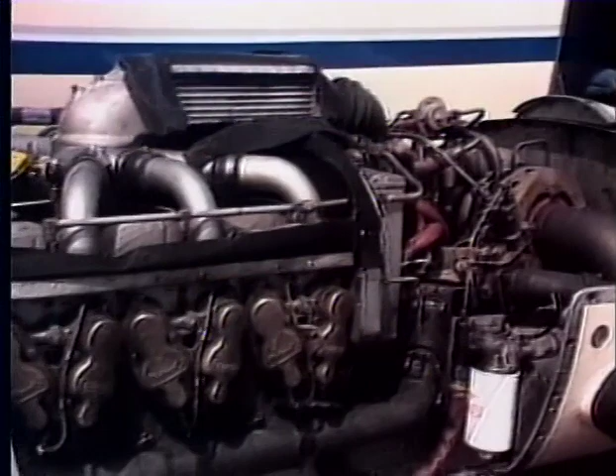What you and I will talk about is the theory and construction of aircraft engines. We're going to lead off by talking about reciprocating engines, you know, these with pistons that fly all around and shake and rattle. We'll get into turbines later on.

Let's talk about the 5 events in a 4-stroke cycle engine. Now, wait a minute—what in Sam Hill is a 4-stroke cycle engine? It's just a 4-cycle engine. That's the FAA's fancy terminology for a 4-cycle engine. They call it a 4-stroke cycle engine. And yes, you heard me right, I said, what are the 5 events in a 4-stroke cycle engine?

Well, here's the way the FAA does it. We all know how an engine works. The intake valve opens, the piston goes down, it sucks in the fuel-air mixture, and that's called the intake stroke. Then both valves close, the piston goes back up and squeezes the fuel-air mixture. That's called the compression stroke.

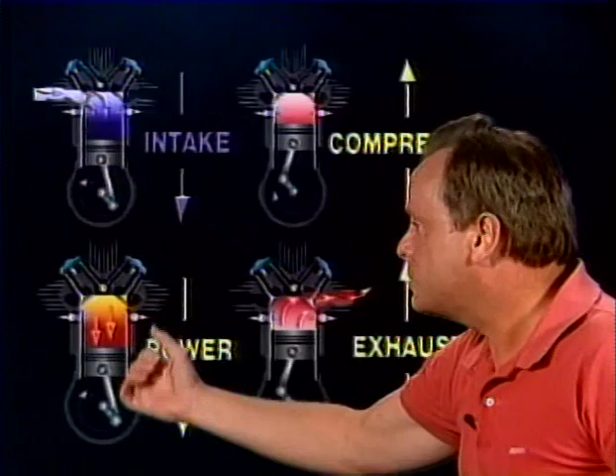And here's the 5th event: the spark plug fires, you have ignition. With both valves closed, the fuel-air mixture burns and expands, shoving the piston back down, and that's called the power stroke. Then the exhaust valve opens, the piston goes up and shoves the exhaust out the exhaust system, and that's called the exhaust stroke. So the 5 events in a 4-stroke cycle engine are intake, compression, ignition, power, and exhaust.

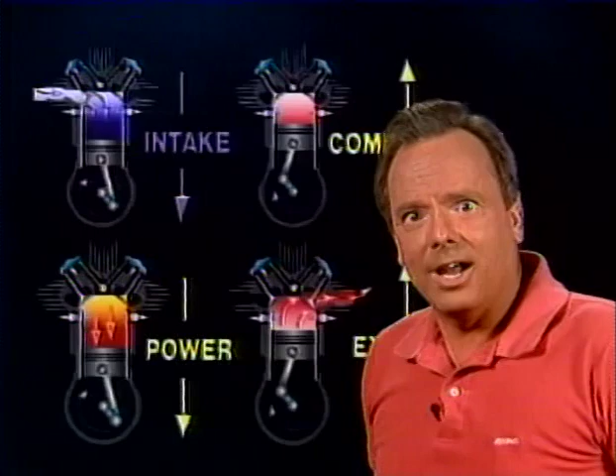Now, I said that in class one time, and some guy said to me, 'Hold it, wait a minute, that's way too doggone complicated.' I said, 'Complicated? What are you talking about? What's so complicated? All I said is, any internal combustion engine is simply a matter of intake, compression, ignition, power, and exhaust.' He said, 'This is way too complicated.' I said, 'All right, what's less complicated?' He said, 'Well, everybody ought to know, especially you ought to know—any internal combustion engine is simply a matter of suck, squeeze, fire, bang, and blow.'

All right, you can make out of that whatever you want. That is not official FAA terminology, but it does help me to remember it. But as far as the FAA is concerned, any internal combustion engine is simply a matter of intake, compression, fire or ignition, power, and exhaust.

Now, they'll ask you some questions about a 4-stroke cycle engine, and they're going to say, on the compression stroke, would the intake valve be open or closed? Well, if you expect to get any compression at all, it's got to be closed. So the intake valve closes on the compression stroke.

And they're going to say, all right, let's assume the exhaust valve of a 4-stroke cycle engine is closed, and the intake valve is just closing. What stroke are you on? Well, once again, if both valves are closed, that's the compression stroke, because the intake valve is just closing, and it does that on the compression stroke.

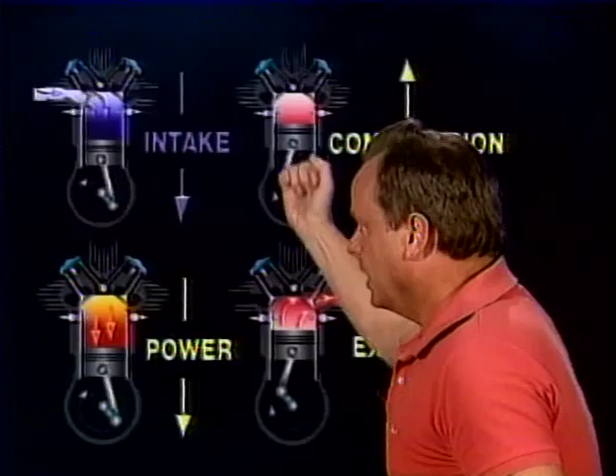Now, here's a couple concepts that are really going to be useful to you to understand some questions later on for the written exam. These 2 concepts, you probably already know them—top dead center and bottom dead center. They're going to be helpful in determining valve overlap and setting timing, and answering questions on a test more than anything else.

All right, let's take a look at it. Top dead center is when the piston has gone on its upward path, stops, reverses itself, and starts back down again. Top dead center is when the piston reverses itself right there. And by the way, it's also when the piston is furthest away from the crankshaft, because the piston is going up away from the crankshaft at that point.

What's bottom dead center? Well, it's when the piston is going down, gets to the bottom of its stroke, and then reverses itself. At that point, the piston is as close to the crankshaft as it's going to be. That is top dead center and bottom dead center. We're going to talk about those concepts later on.

Now, another concept we want to talk about is valve overlap. When I explained intake, compression, power, and exhaust, I implied that these valves open and close at top dead center and bottom dead center, but they don't. In order to help the engine breathe a little better, scavenge the exhaust out of the engine and so on, these valves open slightly off top and bottom dead center. For instance, let's take a look at it.

First of all, at the end of the exhaust stroke, very often you'll find that when the piston is going back up on the exhaust stroke, the intake valve will open 15 degrees before top center. The reason for that is, as the new intake fuel-air mixture comes into the engine, it helps shove out the burnt mixture out the exhaust system.

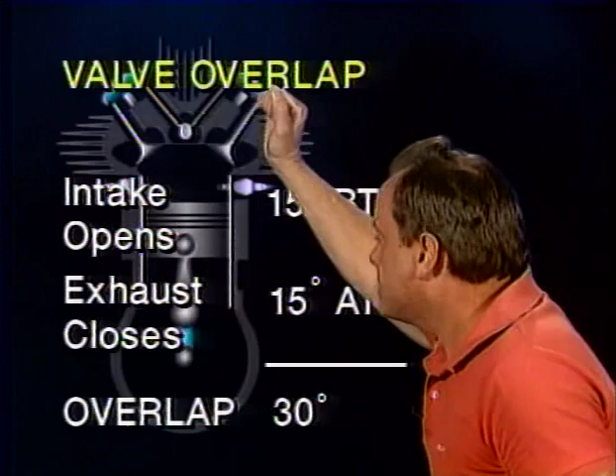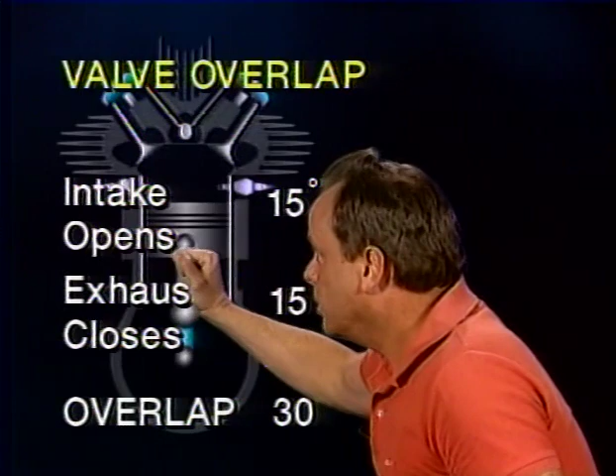Both valves are open for that 15 degrees, and then the exhaust valve also stays open until the piston starts back down 15 degrees after top dead center, because you're still having some of the intake come in and shove the exhaust back out. So there's actually 30 degrees of valve overlap, as you finish the exhaust stroke and start the intake stroke. During that time period, both valves are open for 30 degrees, and that's called valve overlap.

Now, they're going to ask you a question about this on the test, and the question is, why do you have this valve overlap? Why do you have two valves open at the same time? And what is the importance of proper valve timing? Why is that so important? There are actually two reasons you have valve overlap and two reasons proper valve timing is so important.

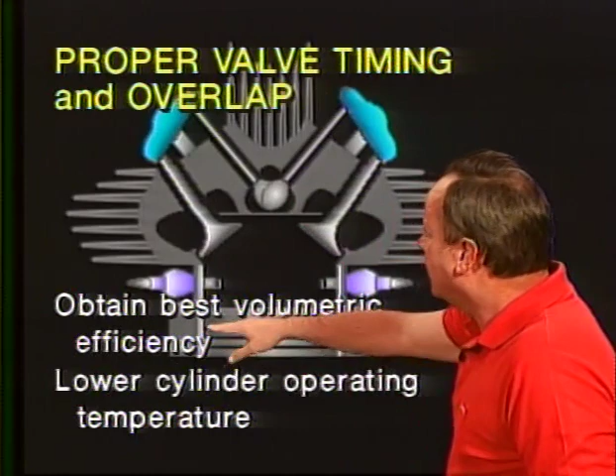These two reasons are that these things help obtain best volumetric efficiency. You might ask, what is volumetric efficiency? Well, that's the ratio of the charge you're putting into the cylinder to the displacement of the cylinder. If you're getting a lot of charge in the cylinder, it means you have very good volumetric efficiency. The other reason proper valve timing and overlap is important is that you get lower cylinder operating temperatures.

Now, these are the correct answers to this question on a test. They also give you a couple of false answers that don't make sense - they're actually correct statements, but not complete answers. For instance, one false answer is that you want to achieve the best possible fuel-air charge, and that's the reason you have proper valve timing and overlap. Well, getting the best charge is one element in volumetric efficiency, and getting the best charge in is actually a function of how long you have the intake valve open. That's not the correct answer. The correct answer is to obtain best volumetric efficiency.

Another answer they give you that's not totally complete is that the reason you have valve overlap is you get better scavenging of exhaust gas. Well, the most important thing for good scavenging of exhaust gas is opening the exhaust valve before you get to bottom dead center, which lets the exhaust start out early on the power stroke. That's how you get good exhaust gas scavenging, but that's not the correct answer to the test. The correct answer on the test is that the reason proper valve timing and overlap is so important is so that you can obtain best volumetric efficiency and lower cylinder operating temperatures. In this particular case, it's important to know these two answers word for word.

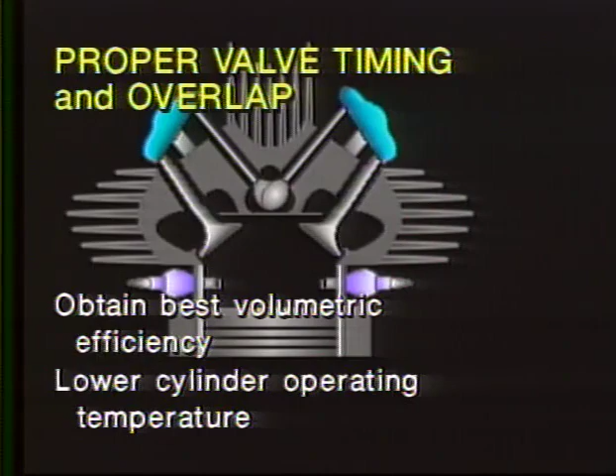Now, they're going to ask, what would happen if the intake valve opened too early? Instead of 15 degrees before top center on the exhaust stroke, let's assume it opened, say, 30 degrees. What would happen? You could have what they call backfiring through the intake, because if the intake valve opens too early when the piston's going up on the exhaust, you're going to have a lot of hot exhaust go into the intake, and that can ignite the intake mixture, causing a backfire. So backfiring would occur - using FAA words here - if the intake valve opens too early, because the exhaust gases would flow into the intake manifold and ignite the incoming fuel-air mixture. So valve overlap promotes better scavenging and cooling characteristics of the engine.

By the way, don't try to memorize these valve overlap numbers - that varies. Sometimes the exhaust valve closes some 10, maybe 15 degrees after top dead center. Once again, it varies. So let's take a look at how the valves might operate on all four strokes of a reciprocating engine.

And here's a typical engine here, and we're starting off with the intake stroke, and of course the piston is going down.

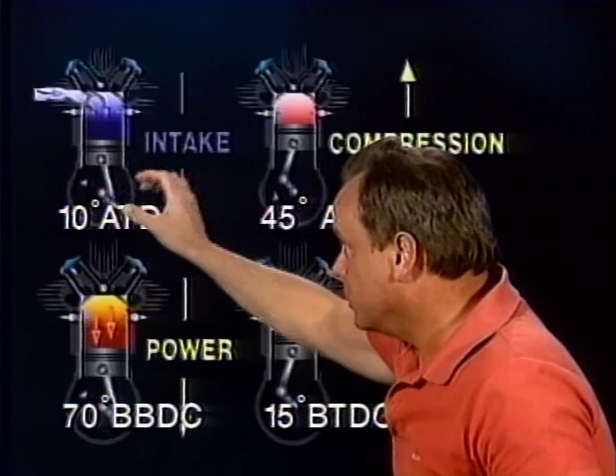On the intake stroke, the exhaust valve doesn't close until about 10 degrees after top dead center, because exhaust is still going out even though the piston's starting back down. So the exhaust valve closes on the intake stroke 10 degrees after top dead center.

Now we've got the piston going down, intake coming into the engine, and on the compression stroke the intake valve stays open and doesn't close until 45 degrees after bottom dead center. The reason is, even though the piston's starting back up, the intake valve is still open because

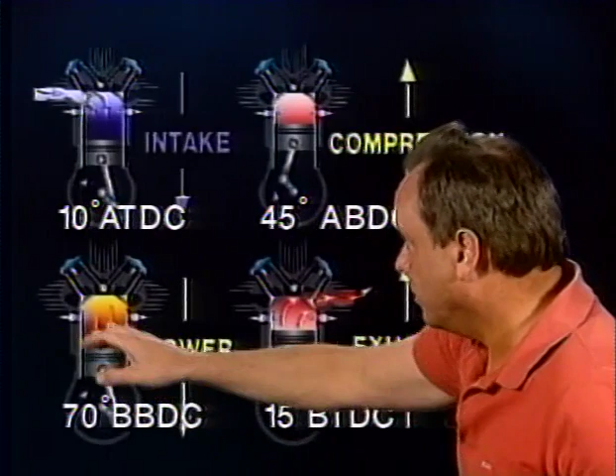some of the fuel air mixture is still rushing into this cylinder. The intake valve closes at 45 degrees after bottom dead center. Finally the intake valve closes. Now you compress the fuel air mixture as the piston goes up, and of course you have ignition, the spark plug fires, the fuel air mixture burns and expands, shoving the piston down.

You'd think both valves are closed for the entire power stroke, but they're not, because at 70 degrees before bottom dead center the exhaust valve opens and the burnt fuel air mixture starts going out the exhaust system right at this time, because in the first part of the travel almost all of the energy has already been taken out of that power stroke.

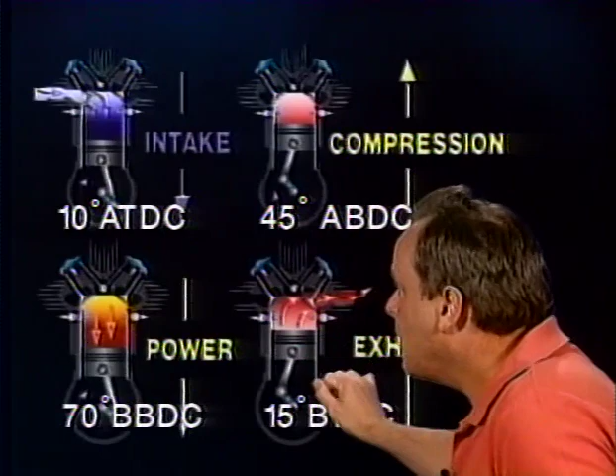And so now we're using the last little bit to help the exhaust go out and help cool the engine. Now the piston goes back up on the exhaust stroke, and about 15 degrees before top dead center the intake valve opens, to help scavenge the engine, to help the intake come in and replace some of the exhaust there. So here's how the valves might operate in this particular case.

Now here's the question they're going to ask you about this on the FAA written exam. They're going to say, given this particular situation, how many degrees of crankshaft rotation are both valves seated this time? Earlier we talked about valves being open, but now we're talking about how many degrees of crankshaft rotation both valves are seated. Well, let's see if you and I can figure it out.

Let's take a look at the numbers. First of all, it's not correct, but we think of during the power and compression strokes both valves being closed. So let's start off that way. Let's assume that were the case, and then we'll make some deductions and change it from there.

Think of on the power stroke both valves being closed, that's 180 degrees of rotation of the crankshaft. And on the compression stroke both valves being closed, that's 180 degrees also. So on the compression and power strokes that's 360 degrees.

But we know that both valves aren't closed. For instance, the intake valve closes 45 degrees after bottom dead center, not at bottom dead center, so you can subtract 45 degrees of crankshaft rotation there. And we know that the exhaust valve opens on the power stroke 70 degrees before bottom dead center. So instead of both valves being closed for 360 degrees on those two strokes, they are closed for 360 degrees minus 45 degrees minus 70 degrees, and both valves are closed for 245 degrees.

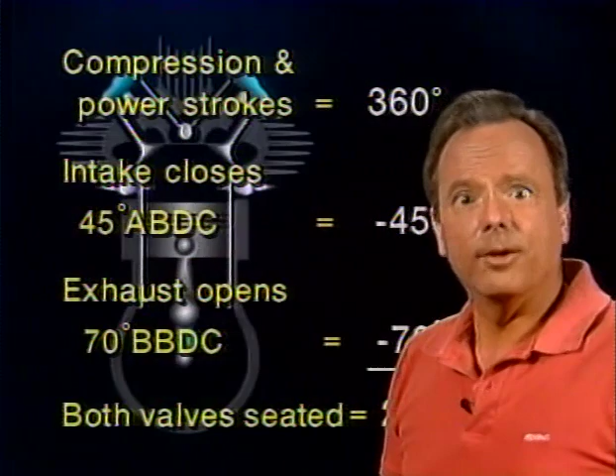Now, as you know, the pistons in an engine don't fire in 1, 2, 3, 4, 5, 6, 7, 8, 9 order. So let's assume you had a 9-cylinder engine. They don't fire in that order. What they do is fire in a firing order that skips around the engine a little bit.

Now the question is, why do you have a firing order that does that? The reason is it helps eliminate vibration and helps balance the engine. Here's the way the question goes on the FAA exam: what is the firing order on an inline, V-type, or opposed reciprocating engine designed to do? The answer is the firing order is designed to eliminate vibration to the extent that's possible and to provide for balance of the engine.

Now we're going to solve a problem in just a minute.

In order to solve that problem, you need to know the firing order in a 9-cylinder radial engine. Now, the engines are numbered so that the number 1 cylinder is at the top, and as you're sitting in the aircraft, 2, 3, 4, 5 are clockwise as you go around. Now, that's how the cylinders are numbered.

How do they fire? What's the firing order? Let's take a look at the firing order in a 9-cylinder radial engine, and it's really pretty easy. First all of the odd cylinders fire: 1, 3, 5, 7, 9. Then you go back and all the even cylinders fire: 2, 4, 6, 8. That's the firing order in a 9-cylinder engine. 1, 3, 5, 7, 9, 2, 4, 6, 8.

All right, now here's the question you need to know. Let's assume you're using a differential pressure to test the compression on an engine. You're using the number 3 cylinder, and you've rotated the engine, first of all, to top dead center compression stroke for the number 1 cylinder.

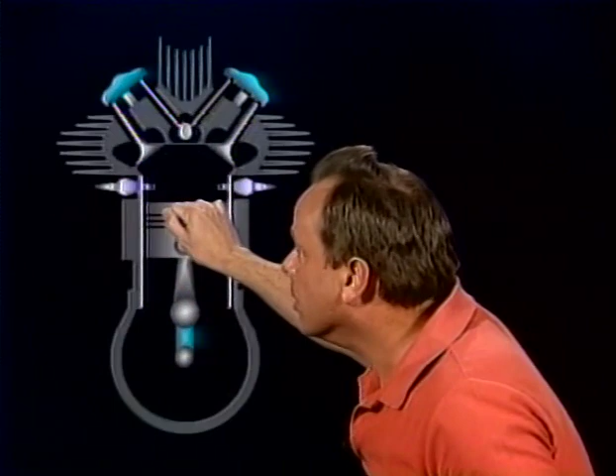See, nothing to it. So, how are engines timed? Well, the ignition is also timed. The whole idea is if the ignition and valves are adjusted properly and the fuel-air ratio is proper, the combustion process should actually be completed just after top dead center at the beginning of the power stroke. In order for that to happen, the fuel-air mixture is generally ignited before the piston gets to the top of the compression stroke. How much before? Generally about 28 degrees.

The fuel-air mixture on a compression stroke is normally ignited 28 degrees before top dead center. So let's assume that the ignition occurs on an engine somewhere around 28 degrees before top dead center on a certain 4-stroke engine, and let's assume that the intake valve opens.

Now let's assume that you have compression going up 28 degrees before top dead center, the spark plug fires, fuel-air mixture burns, piston continues up, and then at top dead center, the piston reverses itself, and now you have the power stroke. You complete the power stroke, and then you have the exhaust stroke. Let's assume on the exhaust stroke the intake valve opens, as you know it does, 15 degrees before top center.

Now, the question they're going to ask you about this is: how many degrees will this crankshaft travel after ignition before the piston comes back around again and the intake valve opens on the exhaust stroke, or before the intake valve opens again? Let's you and I take a look at the numbers.

First of all, we have the compression stroke, and before you get to top center, the ignition occurs 28 degrees before top center. So you have that 28 degrees first, and then you get to top dead center, and then you start the power stroke. You have 180 degrees of power stroke, and you'd have 180 degrees of exhaust stroke, so you have 360 degrees there. But hold the phone - the exhaust stroke has the intake valve opening 15 degrees before top center, so you'd have to subtract that 15 degrees, and the answer to the question is 373 degrees.

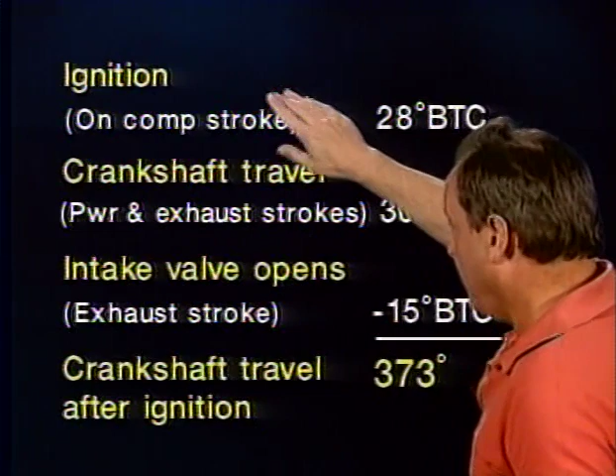Now, what was the question? The question is, how many degrees does the crankshaft travel from the time you have ignition before the intake valve opens again? And the answer is 28 degrees plus 360 minus 15, or 373 degrees. You have to have a pretty good idea of how a piston engine works to answer these, but once you have that, you've got it nailed.

All right, now let's take a look at another question. They're going to say, all right, super mechanic, you have an engine with a stroke of 6 inches - that's how far the piston travels in one direction, either up or down. And that engine is operated at 2,000 RPM. Now, the question is, when will the piston be moving at its maximum speed inside the cylinder?

And the answer is, there's a lot of smoke in this question. It doesn't matter what the stroke is, it doesn't matter what RPM the engine's operated at. The piston inside the cylinder is always moving at maximum speed when the crankshaft is at 90 degrees, like so. What happens at that particular point is the piston is moving at its fastest, at maximum velocity, and the connecting rod and the crank, or throw crank, are at right angles. When that's the case, the piston is going the fastest because the radius has the piston moving at its greatest speed at that particular point.

All right, now here's a question they ask you on the FAA written exam. They say, what is the total piston displacement of an engine, and how do you figure it? Well, the way you figure out the displacement of an engine is you take this little circle at the top of the cylinder, find the area of it, and multiply it times the stroke. That will tell you the displacement of one particular cylinder. Then all you have to do is multiply that times the number of cylinders.

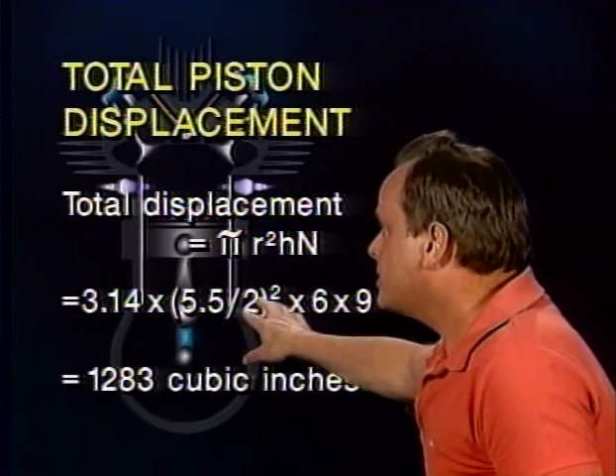The bore is the total diameter of the piston, and we want half of that. So take 5.5 divided by 2. When you get the answer, multiply it times itself, and that's the square - that's radius squared. If you take 5.5 divided by 2 and multiply it by itself, that's radius squared.

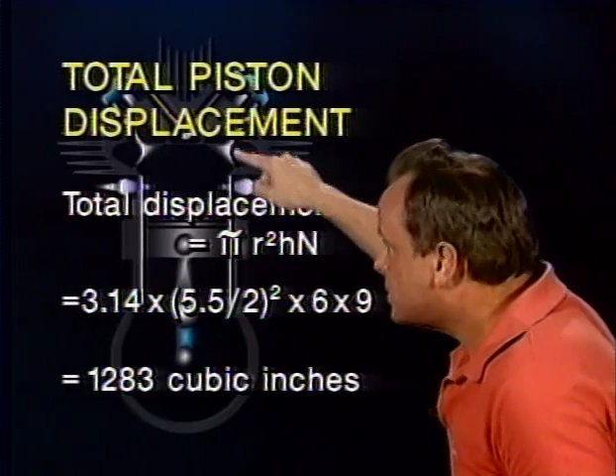Now, the total displacement is what we want to know. It's a 9-cylinder engine with a bore of 5.5, and let's assume a stroke of 6 inches. What you would do is take pi, 3.14, take the diameter of the piston, which is the bore, and divide it by 2, then multiply that answer by itself to get the radius squared. Multiply it times 6, because that is the stroke of the engine. Multiply that times 9, because it has 9 cylinders in the engine, and you have figured out the displacement of that particular engine. If you use your electronic calculator and do all this, you find out it's 1,283 cubic inches. That's about an average displacement for a 9-cylinder engine.

Now let's talk about another concept they want you to know about: the compression ratio of a cylinder. How do you find the compression ratio? You take the total volume of the cylinder when the piston is at the bottom, where the cylinder has a big volume, and you divide that by the volume of the cylinder when the piston's at the top, and that gives you the compression ratio of that particular engine.

Let's figure out the compression ratio of an engine. First, let's assume when the cylinder's at the bottom, the volume is 70, and when the cylinder's at the top, the volume is 10. How do you find the compression ratio? All you have to do is divide. What's the compression ratio of this engine? 7:1. It's written 7:1. Fantastic.

Now, why do you have an engine with lots of cylinders in it? The P-51 Mustang had that beautiful Merlin engine, sounds like silk, has 12 cylinders. Why so many cylinders? Well, with a greater number of cylinders, the smoothness of operation of an engine increases, and the reason is because the power impulses are spaced closer together.

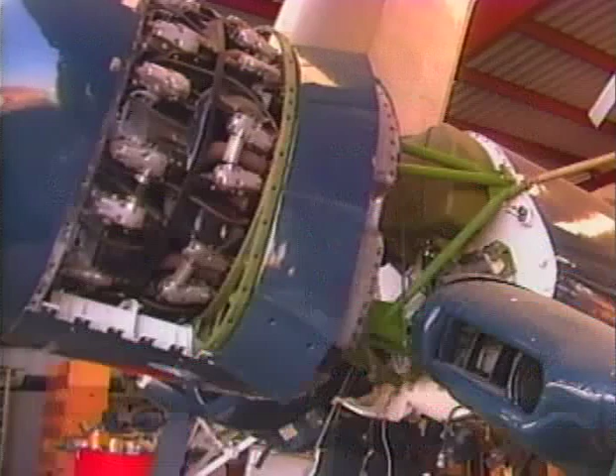How many times does a crankshaft have to rotate for each cylinder to be fired in an engine? The answer is if it's what the FAA calls a 4-stroke cycle engine, the crankshaft must make 2 complete rotations for each cylinder to fire. So the question is, if you have a 4-stroke cycle engine and that engine is to be fired 200 times a minute, how many times a minute must the crankshaft rotate? The answer would be 400 times a minute.

Now let's take a good look at a crankshaft, and one of the things the FAA wants you to know about crankshafts is that there are movable counterweights in here - weights that can move around. They're going to ask you on a test what these movable counterweights are used for. The answer is these movable counterweights are used to reduce torsional vibrations - that's twisting vibrations on the crankshaft. If you put a big rod on the table and a great big flywheel at each end, you could get these flywheels going back and forth like this, and that would be torsional vibration.

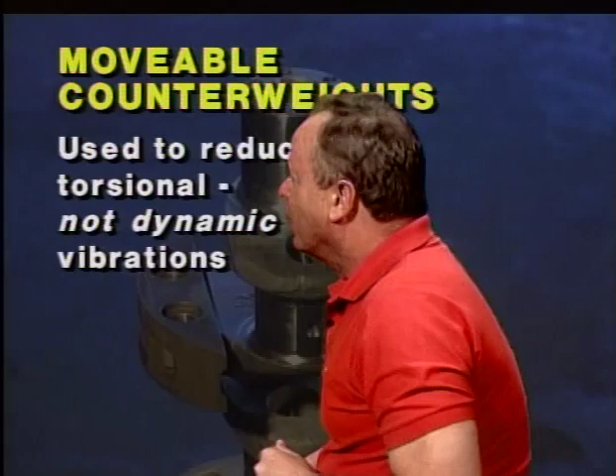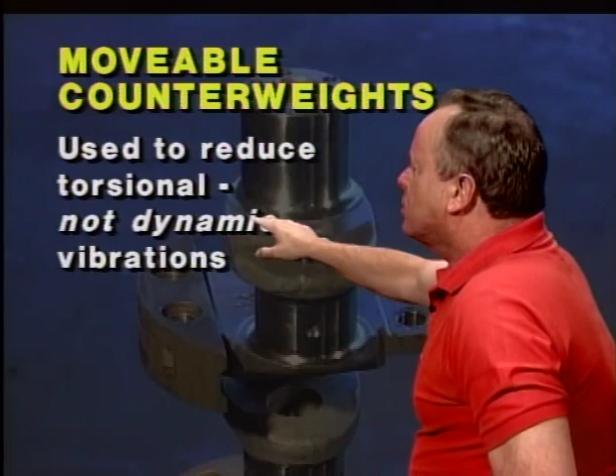Well, that's a bad deal in a crankshaft. It's a type of dynamic vibration, but it says not just dynamic vibrations - it's not all dynamic vibrations, they're looking for torsional vibrations. That is a type of dynamic vibrations, but the thing you need to remember is the purpose of these movable counterweights is to reduce torsional vibrations, not just dynamic vibrations, because they're specifically looking for torsional vibrations.

Now let's talk about cylinders, and here is a cylinder right here inside an engine like so. By the way, the FAA wants you to know sometimes you have a choke or taper ground cylinder, and the whole cylinder itself is bored with a slight taper or choke, kind of like a shotgun can be sometimes.

The end of the bore nearest the head is smaller than the skirt. This is the skirt down here, and this is the end of the bore nearest the head inside there. The reason it's smaller is to allow for expansion at greater operating temperatures near the head. When you get done, you'll have almost a straight cylinder, and that choke will go away when the engine gets hot.

So when the engine is hot, the narrower taper here near the cylinder head expands, and therefore it becomes a straight cylinder rather than a tapered cylinder at that point. That's why they grind cylinders sometimes with what is called a choke or tapered grind.

Now let's take a look at the cylinder walls. The cylinder walls of an engine get a tremendous amount of wear, and we're going to ask you, where do they get the greatest amount of wear? The cylinder walls get the greatest amount of wear near the top of the cylinder, and that's where the temperatures and the pressures are the greatest. So the greatest wear on the cylinder is near the top.

These are FAA test questions coming at you hard and fast here.

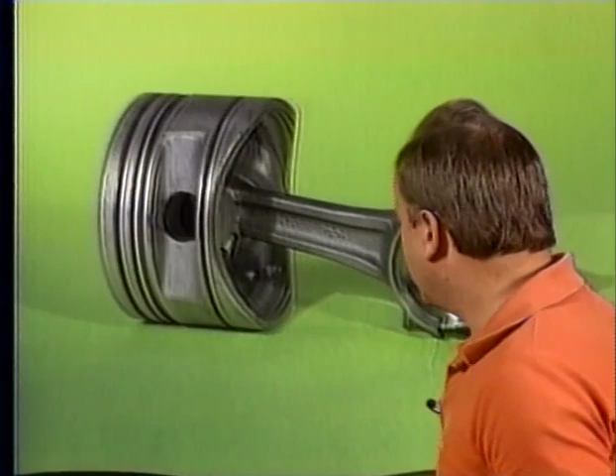Now let's talk about pistons and full floating pins in a piston. Here's a piston, here's a rod. What is a full floating pin? First, the pin is the connecting place between the rod and the piston itself. If it's a full floating pin, it means you can have motion between the pin and the piston, and between the pin and the connecting rod. The pin can rotate clear around, having motion between both the piston and the connecting rod.

Now they're also going to ask why sometimes the undersides of the pistons are finned. In this particular case it's not, but the answer is to provide for greater heat transfer to the engine oil. So if you see fins here, it gives greater heat transfer to the engine oil.

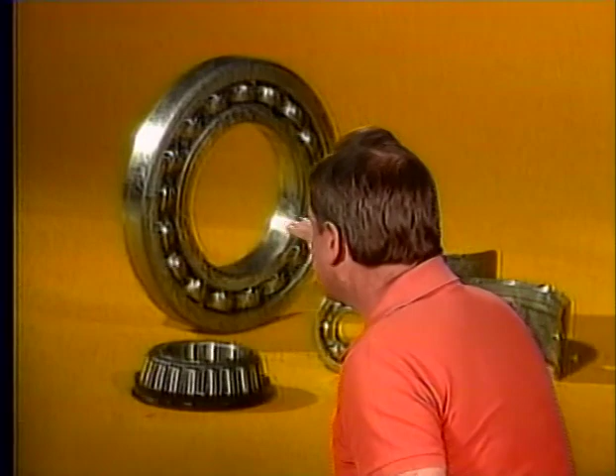Now let's talk about bearings. A bearing is any surface that supports or is supported by another surface, and bearings are designed to reduce friction of moving parts. They're designed to take loads - kinds of loads are thrust loads, which are along the axis of the bearing, and radial loads, which are out from the center of the bearing, or a combination of both.

Types of bearings include plain bearings, which are designed to take radial loads and are used generally for connecting rods, crankshafts, and camshafts in lower power engines. Here's a good example of a plain bearing - these are all plain bearings over here.

Next is a roller bearing, also known as an anti-friction bearing. They can be adapted to either radial or thrust loads, and here's a good example of a roller bearing. Finally, ball bearings provide less friction than any other type.

A ball bearing consists of an inner race, an outer race, a set of polished steel balls, and a ball retainer which keeps the balls from contacting one another - that's a ball bearing. In high-powered reciprocating aircraft engines, there is less rolling friction when ball bearings are used than when roller bearings or any other type are employed. So ball bearings have less rolling friction than any other type of bearing.

Now, we talked earlier about a thrust bearing - that's one designed especially for thrust loads, made with exceptionally deep grooves for the ball races. Bearings designed to resist thrust in a particular direction will have a heavier race design on the side which takes the thrust. A deep groove ball bearing is a characteristic of a thrust bearing used in most radial engines.

Now they ask you some questions about radial engines. One of them is: the master rod bearing in a radial engine is least likely to be what kind of bearing? Well, it's least likely to be a roller or ball bearing, and most likely to be a plain bearing. How much less likely? It's less likely than a rocker arm bearing, a crankshaft main bearing, or a generator armature bearing - those aren't as likely to be plain bearings as is the master rod bearing in a radial engine.

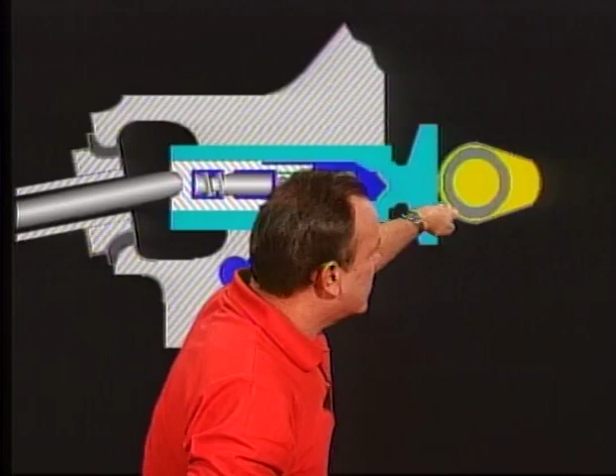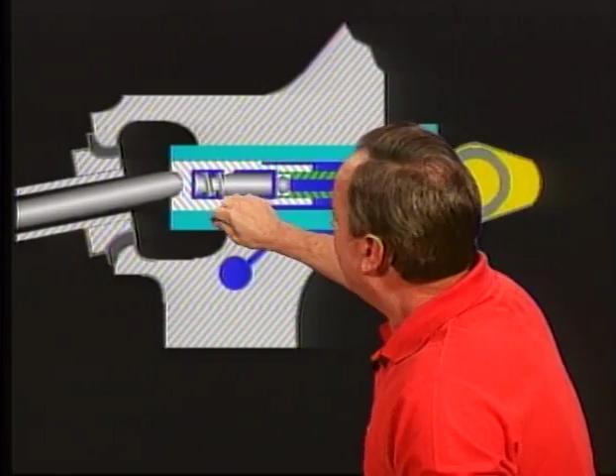Let's take a look at how a hydraulic valve lifter works. Here we have a hydraulic valve lifter, and just to orient you, here's the cam. The lobe comes around and pushes against the tappet, and the tappet shoves over in this direction, and here's the push rod, pushing it over. The deal on a hydraulic valve lifter is that it fills with hydraulic fluid. There's a spring and a check valve, and the whole mechanism works such that the hydraulic fluid we're talking about here is engine oil in this particular case. The mechanism works such that there is no play here. Oil always fills up the space where there would be play, so therefore you have no play back and forth.

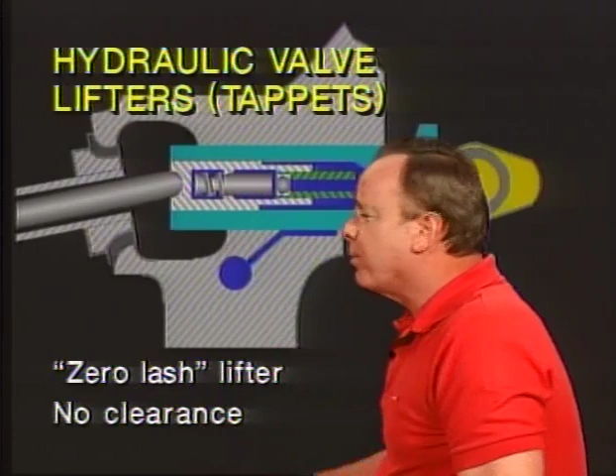There is no clearance on a hydraulic valve lifter, and therefore this is called a zero lash lifter. Now they're going to ask you about these zero lash lifters. That's a hydraulic valve lifter, or a tappet as they call it. So they're going to ask you, during normal operation of an overhead valve engine using a hydraulic valve lifter, how much clearance would be in the valve operating mechanism? And the answer is there is no clearance. It should not exceed 0.000, none at all, after you've reached the minimum inlet oil temperature and cylinder head temperatures for takeoff. So there'd be no clearance at all.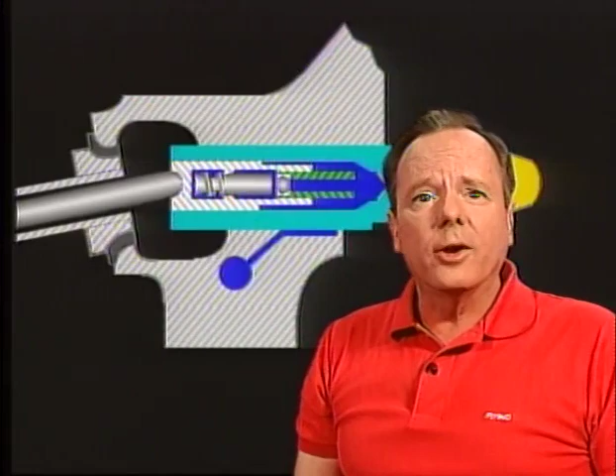Now, let's assume that this piston assembly inside this hydraulic lifter has gone all the way to one extreme. Obviously, you need to adjust the clearance, but you can't do it. How do you do it? Well, the only way you can adjust the clearance in this particular case is simply change the push rod, with push rod replacement, because you cannot adjust the hydraulic valve lifter. If things aren't working out right and you need to change your clearances, you replace your push rods. Just get a different length push rod.

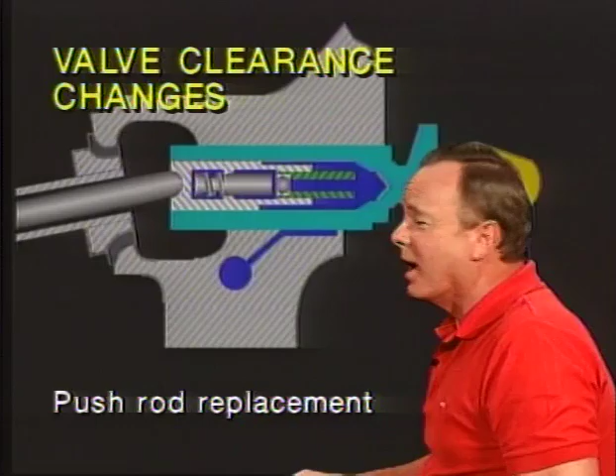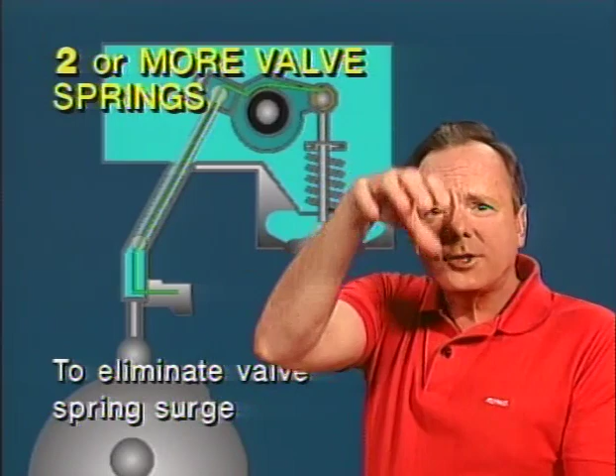Now let's take a look at the valve assembly one more time. One of the things we want to take a look at is the springs. Sometimes when you look at the springs in a valve assembly, you'll notice that each valve sometimes has more than one spring, maybe two or more springs. Why would the valve have two or more springs? The answer is to eliminate valve spring surge. When you have a spring that can oscillate, it'll have a resonant frequency, and sometimes the engine can run at the resonant frequency of that spring. In that case, the spring will float, the valve will float, and it will not work properly. To eliminate that, you put in two or more springs, each having a different resonant frequency, and you hope, therefore, that you eliminate valve spring surge.

Now, sometimes these valves in aviation engines are not solid valves. They are filled with sodium. This is particularly true on exhaust valves. Why would that be? The answer is to dissipate heat well, because exhaust valves particularly have a tremendous amount of heat going by them.

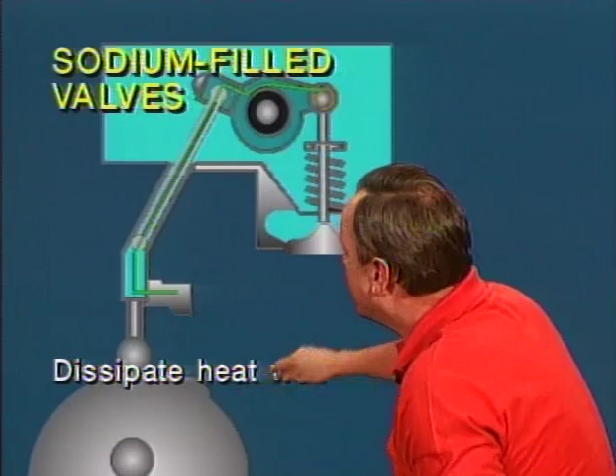You need to be cooled down, and they fill these exhaust valves with sodium to dissipate heat well. Now let's assume you're flying an airplane with an engine that has valves like this—most do if you're flying a piston engine aircraft—and you're having a bad day. Let's talk about what could happen.

There's a lot of wear and tear with this rocker arm pushing against the end of the valve here, and let's assume the end of the valve stem breaks off. If you're having a bad day, the valve could fall inside the cylinder, the piston's going up and down, the valve beats a hole in the piston, and you lose your engine oil and the engine quits, and that could cause an accident. You've had a bad day.

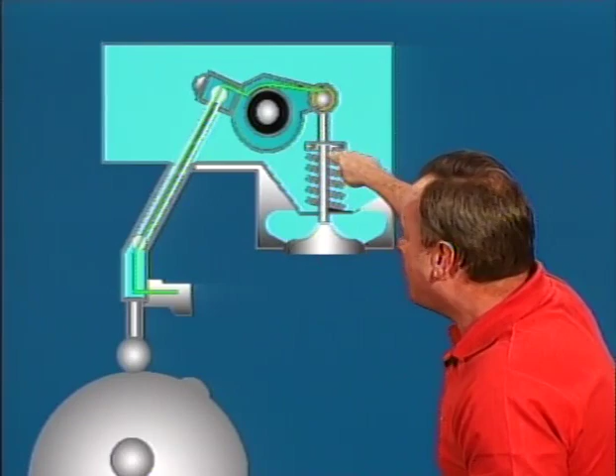If you want to eliminate or minimize the chance of that happening, you can install what is known as a little safety circlip near the top of the valve spring. That safety circlip will prevent the valve from falling into the combustion chamber should the tip of the valve break off, thereby preventing that scenario from happening. So that is what is known, for obvious reasons, as a safety circlip.

Let's talk about propellers and propeller reduction gears. The propeller type certificate data sheets contain a table that lists the engines to which a given propeller is adaptable—translating that into English, if you want to find out if you can put a certain propeller on a certain engine, you go to the propeller type certificate data sheets. That's where you go, type certificate data sheets.

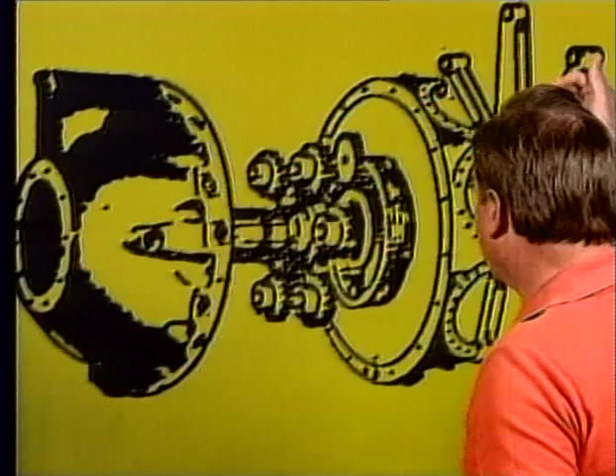Now let's talk about gear reduction of propellers, propeller reduction gears, and their purpose. Here is an example of a radial engine that has a propeller reduction gear, and it operates the propeller at a much lower RPM than the engine. The reason is to allow the engine to have a higher RPM, getting more power, while allowing the propeller to operate at a lower RPM so it's more efficient. It's actually much more efficient aerodynamically for propellers to operate at slower speeds generally than engines. So you have a propeller reduction gear to allow that to happen.

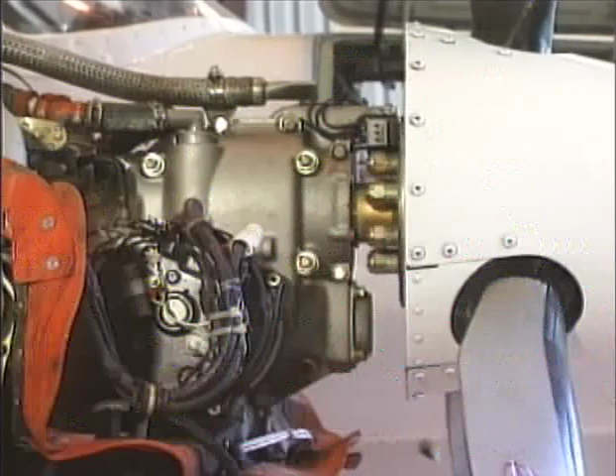Here's a real-life example of a propeller reduction gear. Once again, the whole idea is you're trying to reduce propeller RPM while keeping your engine RPM up, so you talk about how much reduction there is. They're going to ask you a question about this on the test—they're going to give you several gear ratios and ask which one gives you the highest propeller RPM.

The whole idea of gear reduction ratios is to reduce the propeller RPM, so they'll ask which one gives you the highest propeller RPM—it's the one with the least reduction. Here are the ratios: 16 to 7, 20 to 9, and 3 to 2. To answer this, take your electronic calculator and divide 16 by 7, 20 by 9, and 3 by 2, and you get reduction ratios of 2.29, 2.22, and 1.5. Remember, the question was which one gives you the highest propeller RPM—it's the one with the least reduction ratio, and it comes out to 1.5 in this case.

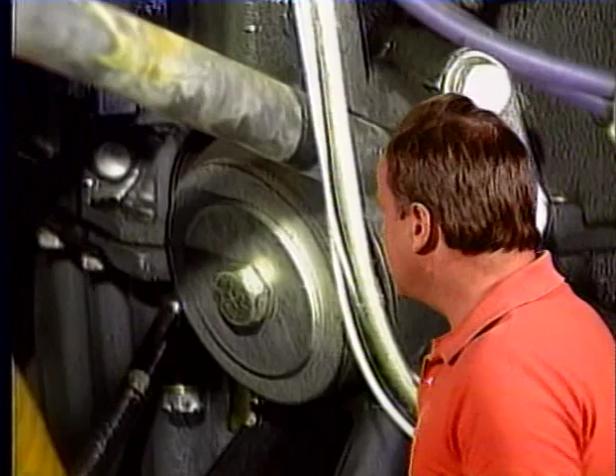Now let's look at how you attach engines to airframes—the way you do it is with suspension. A couple concepts we need to talk about: first, dynamic suspension is putting rubber mounts, or synthetic rubber mounts, on the engine. Let's take a look at some synthetic rubber mounts—these are called dynamic suspension, and that just eliminates vibration. That's the whole idea, just to get rid of vibration.

The next thing we want to talk about is dynafocal mounts. Dynafocal mounts are designed so that you take the stress axes and extend them, and where they intersect will be at the center of gravity of the engine. Basically, this means you're essentially supporting the engine about its center of gravity, or the center of its vibrating mass—they call that the focal point, and that gives a much smoother operation. So the FAA will ask you a question about this: what is the purpose of dynamic suspension?

And the answer is to isolate normal power plant vibrations from the aircraft structure.

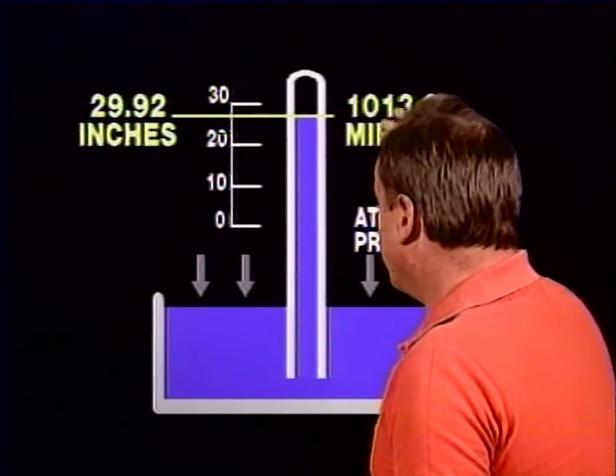Let's wrap up piston engines by talking about a few miscellaneous things the FAA wants you to know. As a mechanic, you ought to know standard sea level pressure is 29.92 inches of mercury. You don't need to worry about millibars. Also, standard sea level temperature is 59 degrees Fahrenheit, not Celsius. That's what you need to know.

Now, if you want to install this engine on an airplane with a standard airworthiness certificate, what do you have to have? The FAA says each power plant must have a type certificate. So if you want to install an engine on an aircraft with a standard airworthiness certificate, the answer is a type certificate.

Now they're going to ask you what critical altitude is. Critical altitude is the highest altitude at which any engine, including a turbocharged engine, will maintain sea level pressure in the manifold, so it can get sea level rated power. On a normally aspirated engine, critical altitude would be sea level—as soon as you leave sea level, the engine begins to run out of power. But on a turbocharged engine, the critical altitude could be a lot higher.

What is horsepower? The horsepower developed inside the cylinders of an engine is known as indicated horsepower. But the horsepower delivered to the propeller of an aircraft is known as brake horsepower—the actual power delivered to the propeller. So inside the cylinders, indicated horsepower; delivered to the propeller, brake horsepower.

Now here's a question: does increased water vapor in the incoming air to a reciprocating engine increase or decrease engine power at a constant RPM or manifold pressure? The answer is increased water vapor decreases engine horsepower, because water vapor is less dense than air, decreases the density of the air the engine is breathing, and also displaces some oxygen. So increased water vapor normally results in decreased engine power at a constant RPM and manifold pressure.

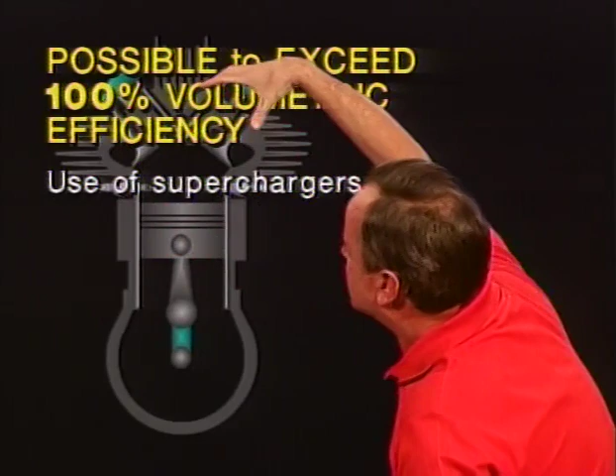Well, yeah, because it's based on standard conditions, and if you could somehow stuff the air into the cylinder, you could get more than 100% volumetric efficiency. How can you stuff the air in there? Well, you can do it by the use of a supercharger and actually stuff the air in the cylinder, and you get more than 100% volumetric efficiency.

Now, let's assume you had a small induction system air leak, and that's going to have a very noticeable effect on the engine. When is it going to bother the engine the most, at high RPM or low RPMs? The answer is the engine is having the hardest time when it's operating at low power, so a small induction system air leak will have the most noticeable effect on the engine at low RPM.

All right, let's talk about these magnificent turbine engines. These engines really are magnificent. Turbine engines have tremendous amounts of power. They operate remarkably smooth, and they're vibration-free. About the only thing you can say against a turbine engine is these things are enormously expensive. And I guess that's the way life goes—anytime something is really, really nice, it's really, really expensive. And it's certainly that way with turbine engines.

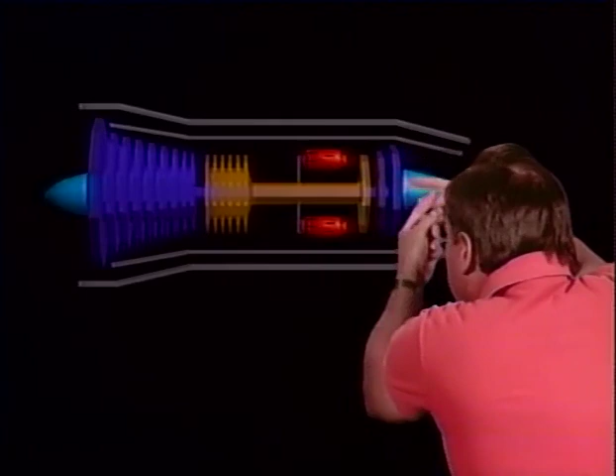All right, let's talk about how a turbine engine works. Let's take a look at a drawing of a turbine engine. First of all, you have the air coming in the intake of the engine up here at the front. Then you have these rotating airfoils that compress the air as it goes through the engine. Notice, by the way, you have intake, now you have compression. So this compressed air now goes back into the engine, enters the burner cans, gets mixed with fuel, and burns. You have ignition, and then the burnt fuel air mixture expands and jets out the back and turns these rotating airfoils, called turbines, and that creates the power to run the compressors.

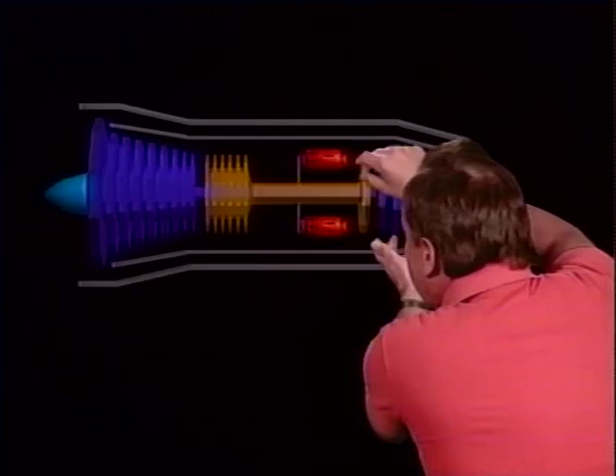You have power, and then the air exhausts out the back. So notice you have those same 5 events taking place inside a turbine engine: intake, compression, power, and exhaust. Well, I should say intake, compression, ignition, power, and exhaust. Now, I got it right there. That's 5 events right there.

All right, and what do the turbines do? Well, the whole purpose of the turbines is that the air jetting past the turbines rotates these airfoils of the turbines, and the turbines in turn rotate the compressors and make the compressors go.

All right, now, those same 5 events occur in a turbine engine then that take place in a piston engine. In a turbine engine, they're called the Brayton cycle, and it's the constant pressure cycle. They don't ask you on a test, but on the piston engines, they're called the Otto cycle, and it's constant volume. But on a turbine engine, these same 5 events are called the Brayton cycle. You need to know that. It's a constant pressure cycle because the burner cans operate at a constant pressure. So that's the Brayton cycle, the constant pressure cycle.

Now, we all know the principle in which a turbine engine works, particularly a fan jet. By the way, if this compressor section is connected to a great big fan and some of the air bypasses the inner core of the engine, it's called a fan jet. If you don't have a fan up here at the front, it's called a turbojet. And a high bypass fan is one which has a lot of air bypassing the inner core of the engine.

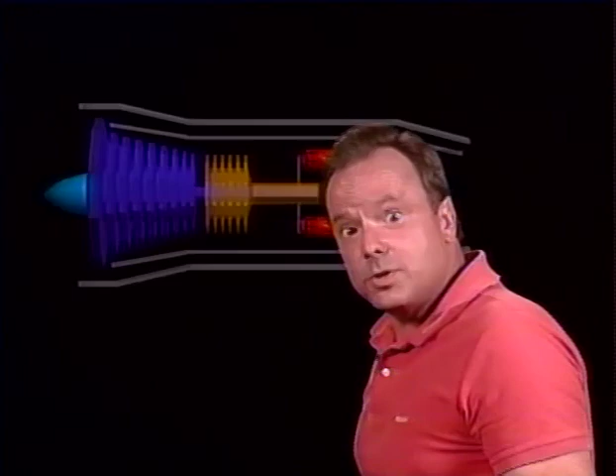Now, we all know the principle upon which these kinds of turbines work is that for every action, there's an equal and opposite reaction. That's called Newton's third law. The air jets out the back, and that's the action which causes the engine to react in the opposite direction. That's Newton's third law. For every action, there's an equal and opposite reaction. Now, we all know that about jet engines. We know that's how it works. We know about Newton's third law. For every action, there's an equal and opposite reaction.

Therefore, on the FAA written exam, they do not ask you about Newton's third law. They ask you about Newton's first law, the law of inertia. It says that every body persists in a state of rest or motion in a straight line unless acted on by some outside force. That's Newton's first law, has nothing whatsoever to do with this, and that's why they ask you about that on the FAA written exam. So if they ask you about Newton's first law on the FAA written exam, do not get confused. Give them this answer: Newton's first law is every body persists in a state of rest or in motion in a straight line unless acted on by some outside force. How about that for something confusing?

Now let's talk about the 3 main sections of a turbojet engine. They are the compressor, that's these rotating airfoils at the front of the engine, combustion, which occurs in the burner cans, and the turbine section, which is the rotating airfoils that the air jets past and rotates to turn the compressors.

So the 3 sections of a turbojet engine are compressor, up at the front, combustion, which is in the burner cans, and turbine. Those are the 3 sections of a jet engine.

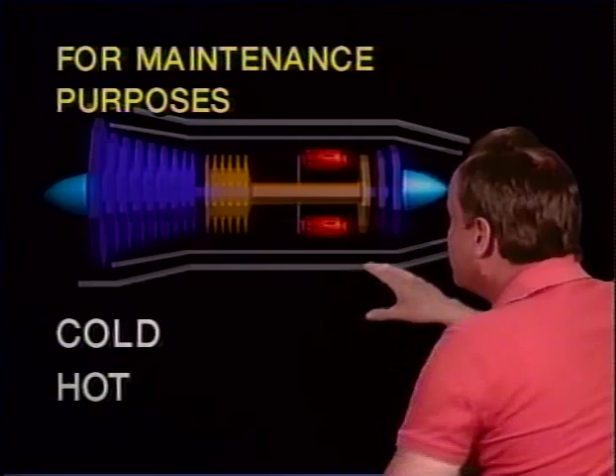By the way, the cold section can still be quite warm because you have a lot of compression taking place, and compression heats up the air.

But it's a lot cooler than after you inject fuel into it and start burning it, and then it gets very hot. Now, the cold section includes the engine inlet at the front, the compressor, and then very often after the compressor, you have a place where the duct widens out, and that's called the diffuser.

Now, let's talk about Bernoulli's principle for just a second. Bernoulli's principle says the faster a fluid goes, the more it expands and the less the pressure is on it. So if you have a narrow spot, the air would rush through and the pressure would be less.

So if you get a wide spot in a duct like a jet engine, the pressure gets greater. The air slows down, the pressure gets greater, and that's what the diffuser is after the compressor blades. Some engines tend to widen out at this spot, and that's called the diffuser.

Now that's the cold section. It's the intake, the compressor, and the diffuser. Now, the hot section of the engine includes the combustor, that's the burner cans, the turbine, and the exhaust section on the way back out. That's the hot sections of the engine.

Now, another thing you should know about the operating principles of a jet engine is that jet engines operate all the time at 80, 90% RPM. You can't really literally fly a jet engine operating at 50% power.

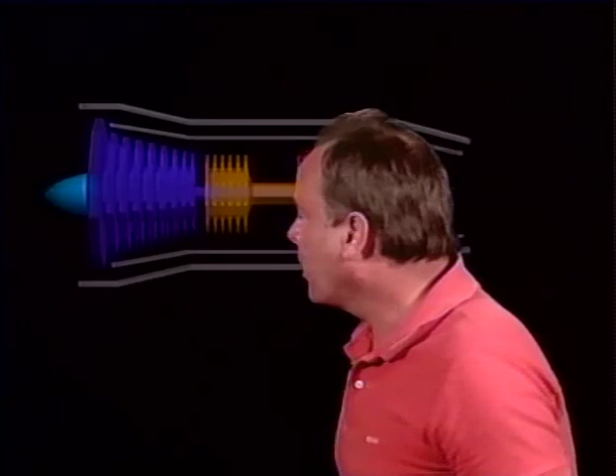The reason for that is as engine RPM increases in a jet, the power increases exponentially. It increases tremendously. The thrust you get out of the engine increases exponentially with small increases in RPM at higher RPMs. So the actual in-flight operating range of a jet engine tends to be 80% on up.

And from 80%, we'll say, to 100%, the thrust will almost double. Depends on the engine, but it generally doubles between 80% and 100%. So jet engines at high RPMs, a little increase in RPM has a tremendous increase in thrust.

So they might ask a question about that on a test. It says at higher engine speeds, thrust increases rapidly with very small increases in RPM.

Now let's take a look at the factors that affect the thermal efficiency of a turbine engine. When we're talking about factors affecting thermal efficiency, we're saying how much thrust you get out of this engine for the fuel that you put into it.

First of all, the turbine inlet temperature. If you could operate at very high turbine inlet temperatures, the engine actually becomes more efficient. The hotter the air coming out of these burner cans and hitting these turbines, the more efficient this engine tends to be.

Now, the problem is that you cannot make metals that'll withstand the high temperatures that you'd like to have. So the primary limitation on the power and the efficiency of a jet engine or any turbine engine is the ability of these metals in the hot section to withstand the temperatures.

So the biggest limitation on the thermal efficiency of a jet engine is the limitation of the metallurgy in the turbine inlet temperature area. Also, the higher compression ratio you have in a jet engine, the more thermal efficiency you have.

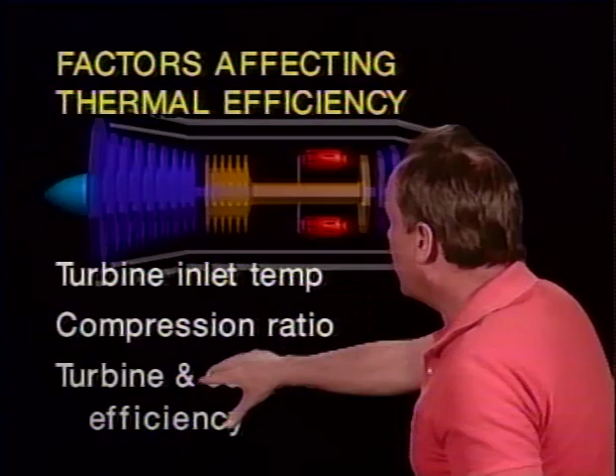But once again, if temperatures get too high, the engine can't take it. Finally, turbine and compressor efficiency: if the airfoils in the turbine section are well designed aerodynamically, it takes less power to turn them. Same way with the compressors. If these are efficient airfoils and efficient designs, you're going to get a lot more thrust out of the engine for fuel, because less thrust is spent turning the compressors. In other words, if you could get by without spending as much power to turn the compressors, the rest of it could be thrust.

So what affects the thermal efficiency of an engine? Well, turbine inlet temperatures, compression ratio, and turbine and compressor efficiency.

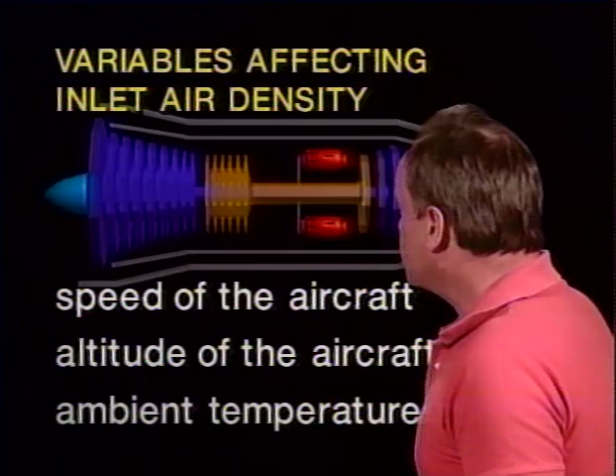Now let's take a look at the variables that affect inlet air density of a turbine engine. A turbine engine is really essentially a normally aspirated engine, and the more air you have coming in the front, the better the engine will do. So the speed of the aircraft affects the density of the air coming into it. Of course, the altitude of the aircraft matters too, as you go to high altitudes, the engine is burning thinner air and doesn't do as well. And the ambient temperature, jets are particularly affected adversely by high temperatures, so if the temperatures are cooler, the jet does a lot better. These are the things that affect the inlet air density of the engine, very much like a reciprocating engine, except the speed of the aircraft is much more important for a turbine engine than for a reciprocating one, along with altitude and ambient temperature.

Now let's talk about how you measure thrust on a jet engine. If the engine has a great big fan at the front like this, measuring thrust is pretty simple. All you have to do is measure the fan RPM somehow, and if you know the fan RPM, you'll know the thrust the engine's putting out, because that fan is just a great big pump pumping air. But if the engine does not have a great big fan like that at the front, measuring thrust is a lot more difficult. You can't use the fan, you have to use something else.

Here's a very elegant solution to that problem. Let's assume you want to measure the thrust of this engine another way. What you could do is put an air pressure gauge at the front of the engine to measure the air pressure going into the engine, and put another air pressure gauge at the back, at the exhaust outlet of the engine, then take the ratio of those two, and that would tell you thrust. That ratio is referred to as engine pressure ratio, or EPR for short. EPR is a direct indication of the thrust output of the engine.

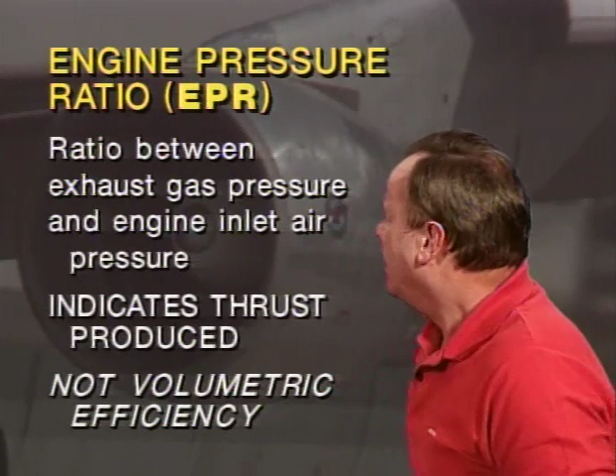On the test, they may give a false answer, a distractor, saying EPR gives you an indication of volumetric efficiency. That is not correct. Volumetric efficiency, which we already talked about, has to do with the piston engine. EPR is engine pressure ratio, and it indicates thrust on a jet engine. It has nothing to do with piston engines in this case. It's a direct indication of thrust, and you get engine pressure ratio by dividing the turbine outlet pressure at the back by the engine inlet total pressure. The ratio between the two is engine pressure ratio, a direct indication of gas turbine engine thrust.

Now, we mentioned earlier that jet engines are greatly affected by high temperatures. You might wonder, how about high atmospheric humidity? Does that affect the jet engine very much? The answer is no. High humidity has little or no effect on jet engines, so it's not a big deal in jet engines at all like it is in piston engines.

Now let's talk about the various sections of a turbine engine, starting with the compressor section. Actually, there are two types of compressors in a jet engine. Here's an example of a jet engine, a JT15D, and this one has an axial compressor right here at the front.

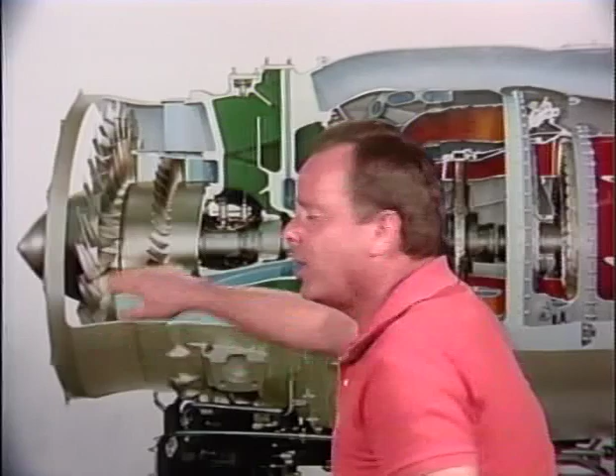Now, an axial compressor is a row of rotating airfoils. You can see right here a row of rotating airfoils that compresses the air along the axis or along the shaft of the engine. That's why they call it axial. It compresses the air by sending it back along the axis of the engine.

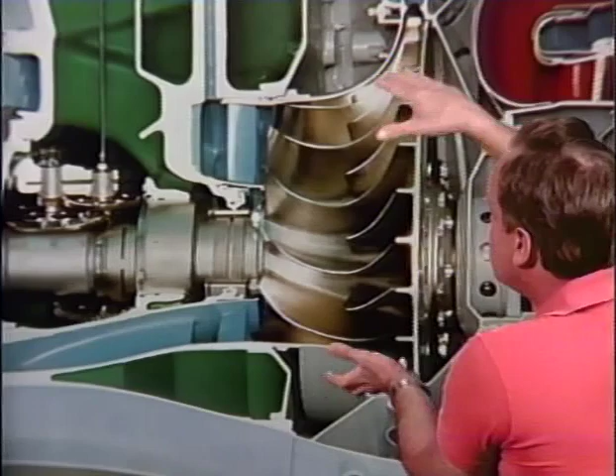Now, the other type of compressor, and the one we're going to spend most time talking about right now, is called a centrifugal compressor. So here's a centrifugal compressor, let's take a closer look at it. A centrifugal compressor works by taking the air, and it's basically an impeller, and it slings the air to the outside of the engine, and compresses it that way. It's almost like a centrifugal pump. It just pumps the air, slings it to the outside, and compresses it.

So there are actually two parts to a centrifugal compressor, and one part is the impeller, and you can see the impeller real well right here. As I say, it just looks like a pump on a water pump, and it is just an impeller right there. And the other part to the centrifugal compressor is what is called the diffuser. We talked about that earlier.

It's an area where the air goes into a wider chamber up here, slows the air down, and increases the pressure because it slows it down due to Bernoulli's principle. The slower a fluid goes, the more the pressure increases. So you have a diffuser here, which is just a wide area in the duct after the compressor that slows the air down and increases the pressure on it.

So there are two parts to a centrifugal compressor. What are those two parts? Those two parts are the impeller and the diffuser.

Okay, now what is the advantage of a centrifugal flow compressor? Well, a centrifugal flow compressor normally can do the entire job in only one stage. Here you notice on other engines, we'll talk about it later on, there's rows and rows and rows of axial compressors. But on a centrifugal compressor engine, you may have only one or two stages, and that is because there's a very high pressure rise per stage in a centrifugal compressor.

Now, there are also two types of centrifugal compressors. This is a single entry compressor. In other words, there's only an impeller on one side, but there are double entry compressors that are centrifugal compressors, and they work by having another impeller identical to it on the other side. Air comes around, enters from the other side, and you use both sides of this disc, and put impellers on them and centrifuge the air out with an impeller on both sides.

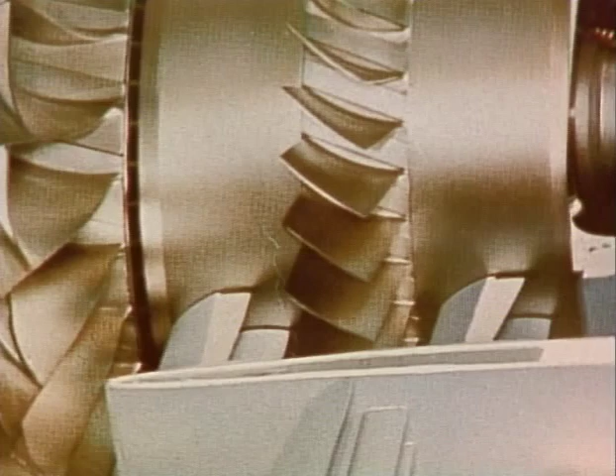Now, let's take a close look at an axial compressor. So here's an axial compressor. Now, it's very important that the air striking these compressor blades comes in at the right angle. So in order to ensure that the air does come to the axial compressor at the right angle, sometimes you have what is known as an inlet guide vane assembly.

And here's an example of an inlet guide vane assembly. By the way, it's cut away up here, so you can look down here. The inlet guide vane assembly is an assembly that directs the air so that it strikes the compressor blades at the proper angle. On the test, you need to know the function of the inlet guide vane assembly, and that's this right here on an axial flow compressor, is to direct the air into the first stage rotor blades at the proper angle.

Now, let's take a look at the engine from a bigger scale again. Now, if you look real close at an axial compressor, you'll notice that in between the rows of rotating airfoils, there's also stationary airfoils in between. Now, they've cut them out, but you'll see down here there's stationary airfoils in between the rows of rotating airfoils.

The rotating airfoils are called rotors, and the stationary airfoils are called stators. The rotating airfoils are designed to move the air back, and the stators are designed to direct the air and shape it to meet the next row of rotating airfoils. So the two basic parts of an axial compressor are rotors, which rotate, and stators, which stay stationary - that's why they call them that.

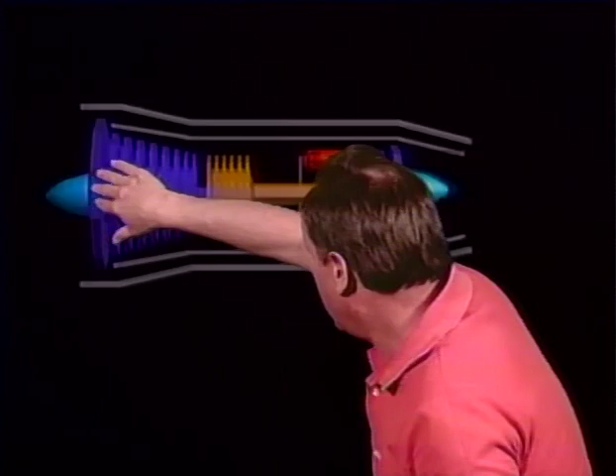Also notice that the N2 compressors are called the high-pressure compressors. The reason is the air pressure is boosted up a little bit by the compressors upstream, and then these high-pressure compressors boost it up even further. So you have this shaft, this turbine, and this compressor, and that's called N2 - the high-pressure turbine and high-pressure compressor.

All the way inside this shaft, there's another shaft, blue in color in our drawing, that goes to the low-pressure turbines. The reason they're called low-pressure turbines - since there are two of them - is that some of the air pressure has already been extracted by the high-pressure turbines. So these are low-pressure turbines, and this is a low-pressure compressor because it's the first compressor, just beginning to compress the air. That shaft goes inside the N2 shaft, and this is called N1.

Now this has a lot of advantages. First of all, if you're going to start an engine like this, all you have to do is get N2 rotating. As it rotates, the compressors compress the air, you add fuel, and the whole thing lights off. Then when the air starts jetting out the back, it'll also start rotating N1. But to start this engine, you don't have to turn over the entire engine - all you do is turn over N2, making this engine a little easier to start.

Also, you'll find that these two rotors will rotate at different speeds. So as you go to higher altitudes, N1 seeks its own speed. There's thinner air at higher altitudes, so this N1 compressor might speed up a little bit, and N2 would seek its own speed. That means each turbine and compressor, each rotor, is operating most efficiently.

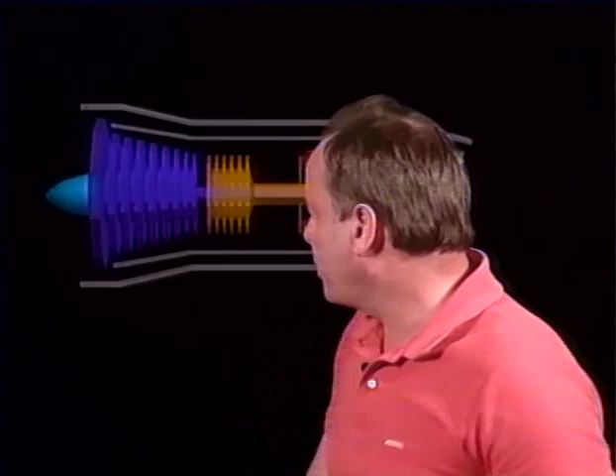Now, what are the advantages? Split spool, axial flow compressors - axial flow, remember, are the ones that move the air back along the axis instead of centrifugal - offer the greatest advantages for both starting flexibility and improved high altitude performance. Those are the things you need to know for the test. They also call it a dual axial flow compressor, split spool or dual axial flow compressor, and it improves the efficiency of a turbojet engine because you have higher compression ratios. Why? Because you simply have more stages of compression.

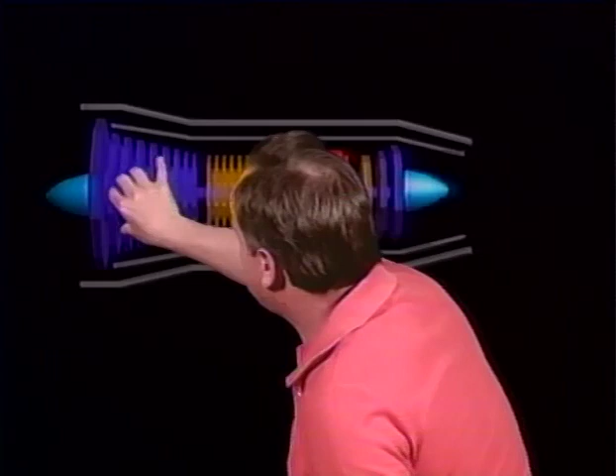All right, now they're going to ask you some more questions about it. How about: the fan rotational speed of a dual axial compressor forward fan engine is the same as the low pressure compressor? Let me translate that into English. That was an FAA test question. What they're saying is if you have a fan on this engine, it's attached to the low spool compressor, so it operates at the same speed. The fan rotational speed of a dual axial compressor forward fan engine - the fan speed of this engine is the same as the low pressure compressor because they're attached to each other, that's all.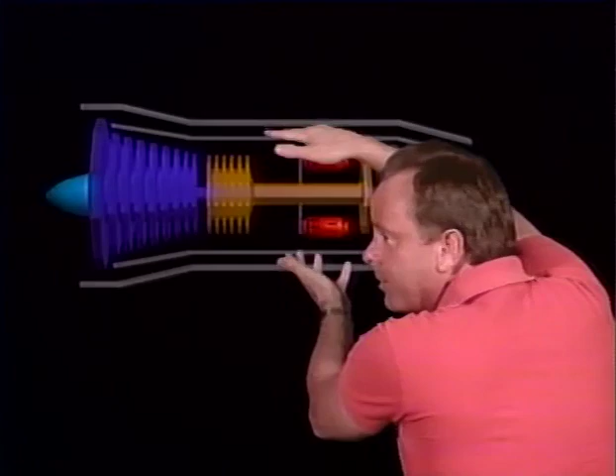What determines the compression ratio of an axial flow compressor? The answer is the number of stages. We've already covered that. And where will the highest gas pressure in this engine occur? Now that's almost a trick question. You would think offhand that the highest gas pressure would occur in the burner can, but that is not true. The highest gas pressure, the highest pressure in a jet engine, occurs as you come out of the last compressor stage, or as you end the diffuser, or as you enter the burner can. Those are all about the same place.

Out of the compressor outlet, in the diffuser, or at the entry of the burner can. Why not in the burner can? Well, the purpose of the burner can design, the aerodynamic design, is to increase the velocity of the air. The air coming out of the burner is at high velocity, and it's not at the highest pressure. The highest pressure is as the air enters the burner can. If you think about it, it has to be that way, because if you didn't have higher pressure outside the burner can, the air would not enter it. So the highest pressure is at the entrance to the burner can.

Now let's take a look at the design of a turbine engine compressor blade. I want you to know that sometimes a compressor blade is known as a cutout, meaning it has a hole in it and it reduces blade tip thickness. So as a question on the FAA written exam, the profile of a turbine engine compressor blade is a cutout that reduces blade tip thickness. That's what you needed to know.

Now let's take a close look at an axial flow compressor in a turbine engine. When you do that, you'll notice these compressor blades are airfoils, just like the wings on an airplane. And just like the wings on an airplane, they can stall, particularly when the engine's going at low RPM, there's not much ram air pressure. These compressor blades are working pretty hard and they might stall.

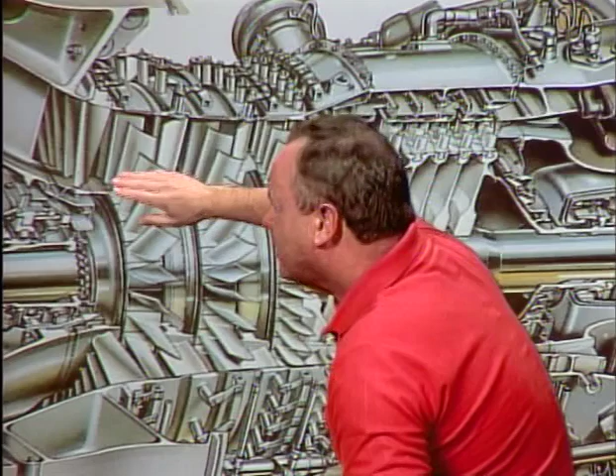There is a solution to relieve some of the pressure from the compressor blades by venting off excess air within the compressor and venting it overboard. They use bleed valves to do that. The FAA wants you to know: bleed valves vent excess air within the compressor section to allow it to go overboard, which prevents compressor stall when you have low compressor RPMs and low ram air pressure coming into the engine.

Now let's take a look at our drawing of a jet engine again. We'll look at the diffuser section, which we talked about earlier. Where is the diffuser section located? It's a wide spot in the duct after the compressors and before the burner can, so it's located between the compressor section and the burner section.

What is the purpose of the diffuser section? Remember Bernoulli's law says if you slow a fluid down, you increase the pressure. So the purpose of the diffuser section is to increase pressure and reduce velocity. They'll ask you where the pressure is greatest in a jet engine - it's the compressor outlet, or the diffuser section, that has the greatest pressures.

After the diffuser section, you have the combustion section. Where is it? These are the burner cans, which provide for proper mixing of fuel and air. The air passing through the combustion chamber is used to support combustion and also cool the engine, since there's more air going through the burner cans than is necessary for combustion - the rest cools the engine.

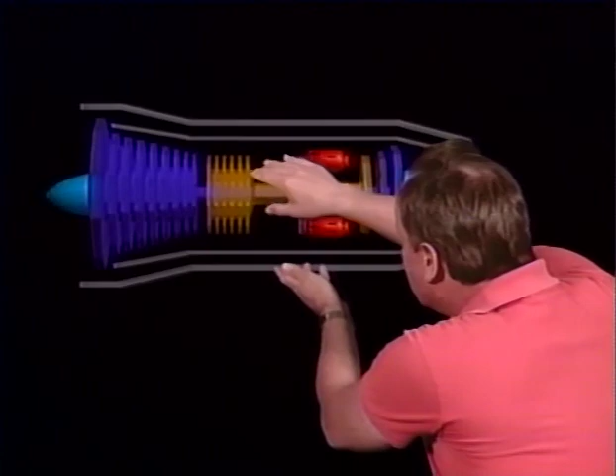They'll ask where the highest gas pressure is in a turbojet engine. We already covered that - just as you leave the compressor or enter the diffuser, or at the entrance to the burner cans. All mean essentially the same thing. The highest gas pressure is just before the burner cans - you could call that the diffuser section, the inlet to the burner cans, or the outlet to the compressor, but it's all the same place.

The thing about a gas turbine engine is that combustion occurs at a constant pressure. So in the burner cans, combustion occurs at a constant pressure, which is why they call it a Brayton cycle, or constant pressure cycle, that the turbine engine operates on.

They'll ask what types of combustion sections are found in aircraft turbine engines. We have examples here of multiple cans, which are just little individual cans. An annular section is like a donut - an entire donut going around the rotor. The word annular means donut, though why they don't just call it a donut section, I don't know. Another type is can-annular, with cans arranged in donut fashion around the rotors. So the three types are multiple can, annular, and can-annular.

Now let's move beyond the combustion section back to the turbine section. The turbines are rotating airfoils, and the air coming out of the burner can turns these turbines. Turbines also have rotors and stators - the rotors are the rotating airfoils, and the stationary airfoils that guide the air into the turbines are called stators.

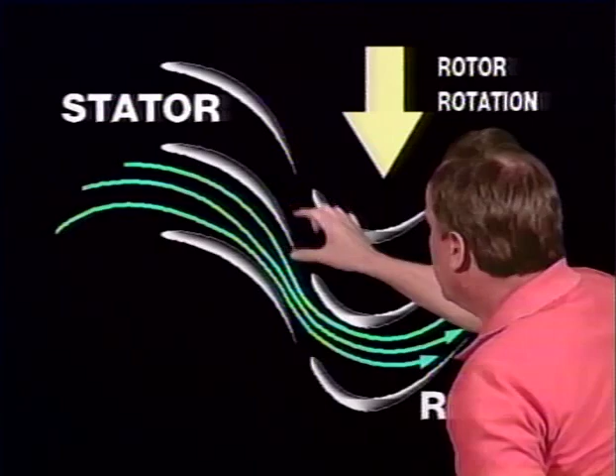The purpose of the stators is to increase air velocity into the turbine. Let's take a look - the stators are arranged so that they get narrower, and the air has to go through faster. So the stators increase the velocity of the air as it goes to the turbines. These are the stationary airfoils, and these are the rotor parts, the moving airfoils.

Now the stators in the compressor section actually decrease the velocity of the air, so they're different - here these stators are designed so that they get narrower and increase the velocity of the air. They sometimes call these stators, just before the turbines, a nozzle diaphragm.

And all it is a row of stators. They call it a nozzle because if you look at these stators, they look like they squeeze the air down like a nozzle does, right at this particular point. So they're going to ask you, what is the function of a nozzle diaphragm in a turbojet engine?

The function is to direct the flow of gases to strike these turbine buckets. These turbine blades are often called turbine buckets, at a desired angle.

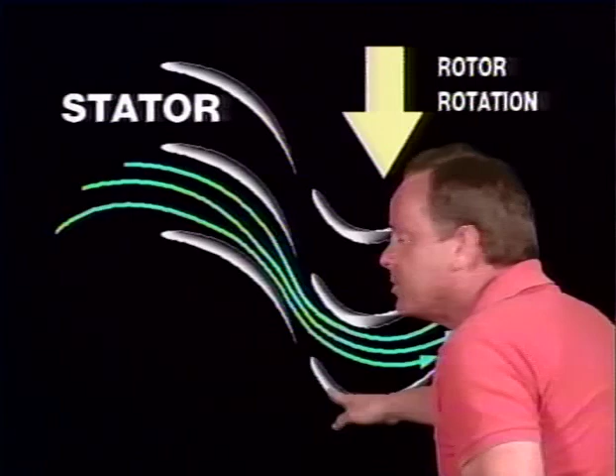Now there are basically two types of turbine blades or turbine buckets: reaction and impulse. If you look at this, the air hitting this would move this turbine blade just like water moves a water wheel. That is called an impulse type of turbine blade.

If, on the other hand, the airfoil shape of the turbine blade makes it move, that is called a reaction type. Turbine blades can very often be both at once—one section is an impulse blade and another section is a reaction section, and the two combined are reaction impulse blades. But those are the two principles that turbine buckets or blades work on.

That's reaction and impulse. Sometimes they put a shroud over the ends of these turbine blades, like so. You'll see a shroud over the ends of them, completely connecting them together, and that shroud is shaped so the ends form a band or a shroud, which reduces vibration and improves airflow characteristics.

So they're going to ask you, what do shrouded turbine blades do? They improve airflow characteristics and they reduce vibration. That's the purpose of shrouded turbine blades.

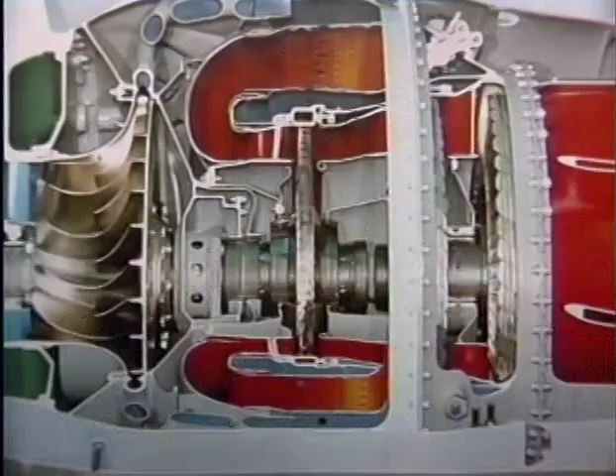Now let's take a look once again at this centrifugal compressor, and here's a good example of one. They're going to ask you a question on the test: how do you join the turbine shaft—here's the turbine shaft, and here's a turbine back here on the right—to the rotor of a centrifugal compressor? How are these two joined together?

And the answer is with a spline coupling, very much like the drive shaft on a car going out of the transmission into the drive shaft has a spline coupling—that's how those two are held together with a spline coupling right there. Now let's take a look at our drawing of a jet engine again.

They're also going to say, take a look at these turbines near the rear of a jet engine back here—what is their purpose, why are they on this engine? The answer is the function of these turbines near the back of a jet engine is to drive the compressors up at the front of the jet engine, and that's the only reason they're there.

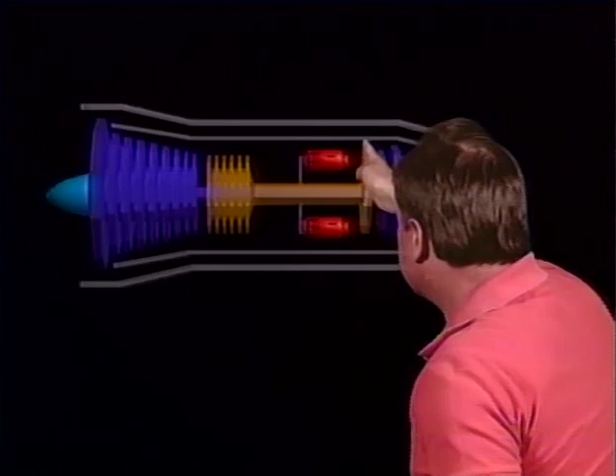N2 is the high pressure compressor and the high pressure turbines. So if they ask you which turbine drives the N2 compressor, it's the first stage turbine, or the high pressure turbine. This is a first stage turbine, this is a second stage turbine, so this first stage turbine drives the N2 compressor. They're going to ask you that on the test.

They'll also ask you a few things about terminology. Let's take a look at what they're going to ask you about terminology. They're going to say, what does PT7 mean?

PT stands for total pressure, that's total pressure at station or position 7 in the jet engine. Where is position 7? On a two-spool axial flow compressor, it's at the very rear of the engine, at the outlet, and it's the turbine discharge pressure. So PT7 means total pressure at station 7, identified in the service manuals as the turbine discharge pressure, right at the back of the engine.

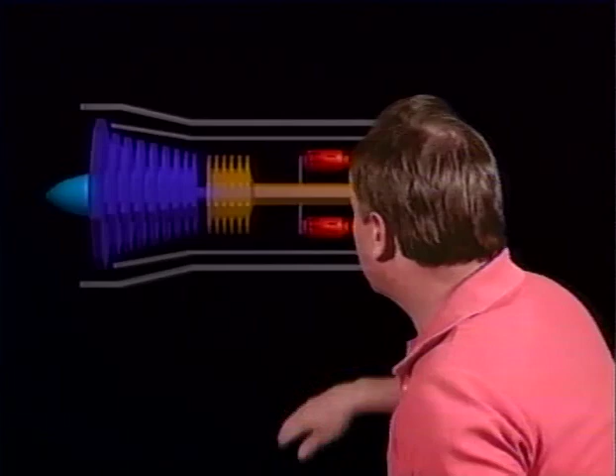We talked about this earlier. What is the ultimate limiting factor of a turbojet engine? The answer is turbine inlet temperature. That's the ultimate limiting factor, because if you could withstand higher temperatures, you could get more power and more thermal efficiency out of the engine.

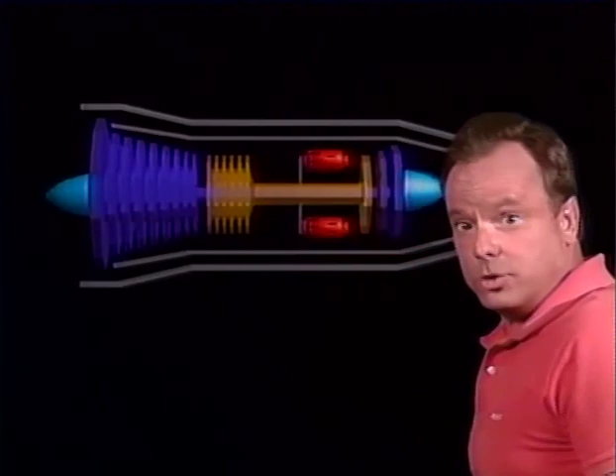Enough with the turbines. Now let's go to the very back of the engine and talk about the exhaust section of a turbine engine. What is its purpose? Its primary function is to straighten and collect exhaust gases into a solid, high-velocity exhaust jet.

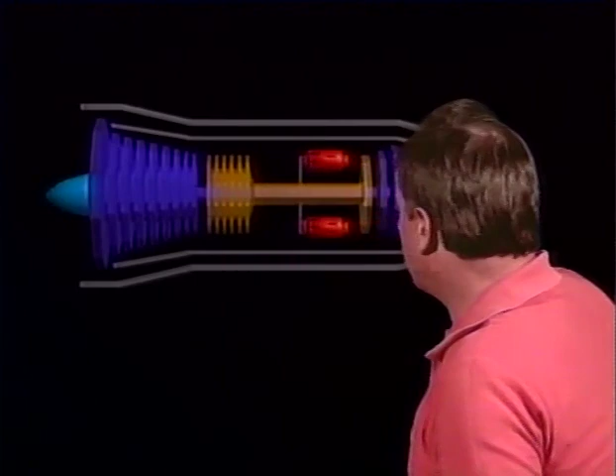How do you straighten them? You don't want the gases swirling around, so there's a cone in the inner part of the engine, normally held by little struts, and those struts help to straighten the air's velocity. So the primary function of the exhaust cone is to straighten and collect exhaust gases into a solid, high-velocity exhaust jet.

The exhaust section of a turbine engine imparts a high exit velocity to the exhaust gases, something you need to know. And where is the jet nozzle on a turbine engine located? It's located at the exhaust section of a turbojet engine.

Now let's look at a couple designs of exhaust sections. First, here is a convergent nozzle. The nozzle comes in and tightens up at this point, restricting the space the air has to flow through. A convergent nozzle, talking about subsonic air, causes subsonic air to increase in velocity. Bernoulli's law says when something increases in velocity of fluid, the pressure decreases. So a convergent nozzle causes the air to increase in velocity and decrease in pressure.

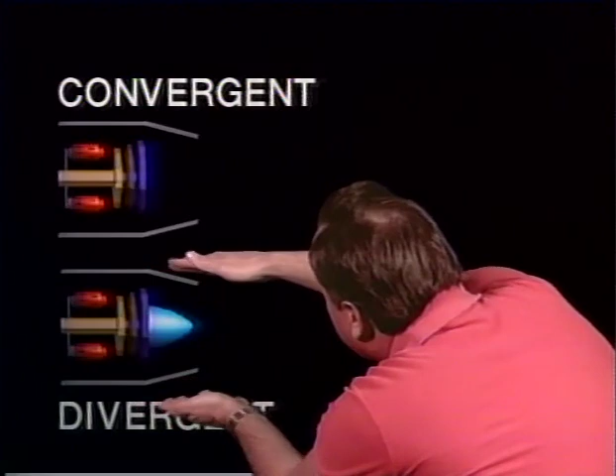Now let's talk about what, with subsonic air, a divergent nozzle would do. This is an example of a divergent nozzle, because if you look at this cone and the outer part of the nozzle, the space for the air gets greater instead of less. See how it gets greater there? That's a divergent nozzle, and it causes the pressure to increase and the velocity of the air to decrease.

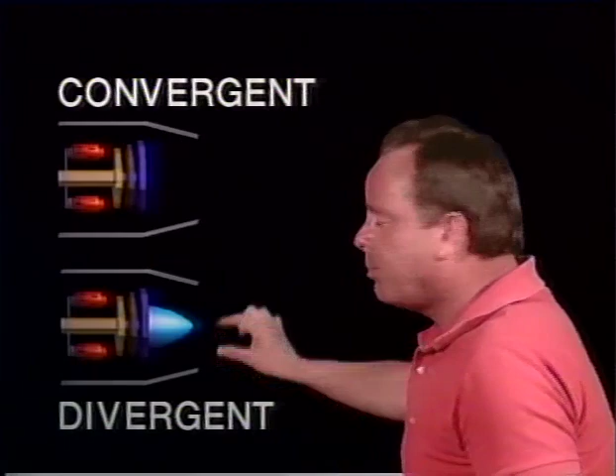Again, that's Bernoulli's law. Unfortunately, Bernoulli's law kind of goes out the window when you're talking about supersonic air — we'll talk more about that later. But one more time: a convergent nozzle causes the velocity of the air to speed up and the pressure to decrease. A divergent nozzle causes the air to slow down and the pressure to increase. So what does an exhaust cone do at the aft part of a jet engine? This whole assembly will cause the pressure to increase and the velocity to decrease if it is divergent.

Now, the last thing we need to talk about is supersonic flow of air. If you have supersonic air, it's a whole different ball game. Very often when talking about supersonic air, you're talking about an engine that goes supersonic — an afterburner often has supersonic air flowing through it, with a convergent nozzle and a divergent nozzle. You have to memorize this because it's different than Bernoulli's law: a divergent nozzle with supersonic flow causes the air to decrease in pressure and increase in velocity, and that's with supersonic flow.

Believe it or not, we have discussed everything you need to know on the FAA written exam about turbine engine and reciprocating engine theory and construction.